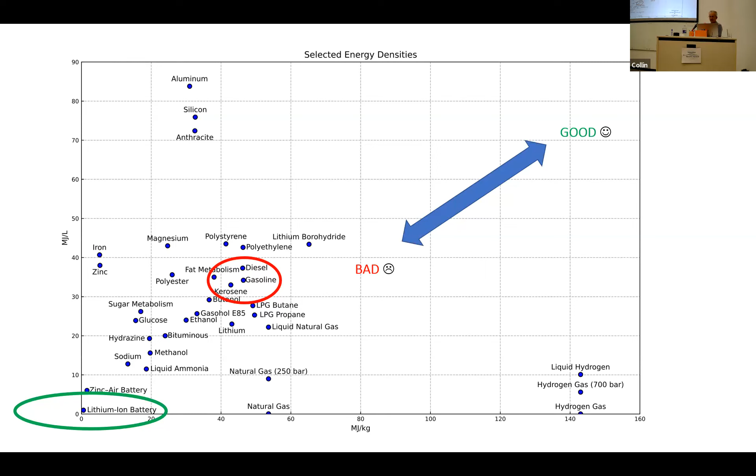Aviation fuel has a usable energy by weight of around 4,000 watt hours per kilogram. It really has about 12,000 watt hours per kilogram, but you can only use about 30% of that energy because the rest you have to dissipate in thermal management—otherwise it's a blowtorch, and a blowtorch burns through steel, any material. Well, maybe not the space shuttle tiles, but you can't make affordable engines out of space shuttle tile materials.

Lithium ion batteries have an energy by weight today of around 250 watt hours per kilogram. Aviation fuel has around 16 times the amount of energy per unit weight that lithium batteries have. I'm going to start off like a Debbie Downer in this presentation, but we're going to get a little better. It is a very large challenge to overcome the amount of energy that's in liquid fuels.

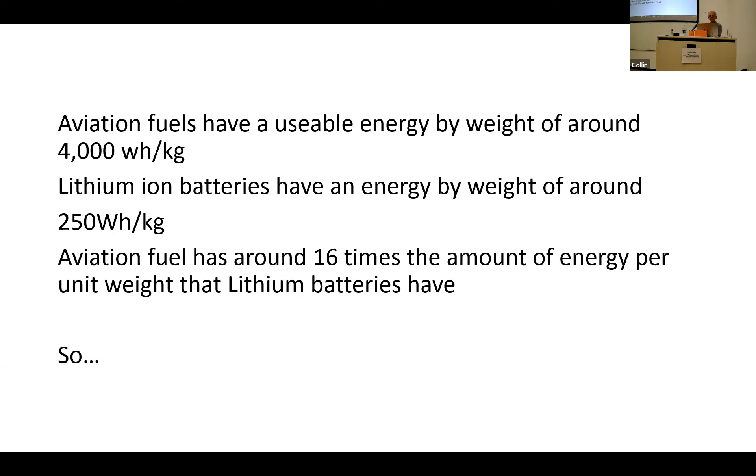The largest airliner, the Airbus A380, can fly 500 people for 16 hours on its fuel load—that's about 8,000 miles. If that aircraft had batteries for fuel based on weight, it would be able to fly... I didn't finish my slide, but divide your miles by 16. So let's see what that comes out to: 8,000 divided by 16 is about 500 miles. So that's not insurmountable. It's not economic, but it's not insurmountable.

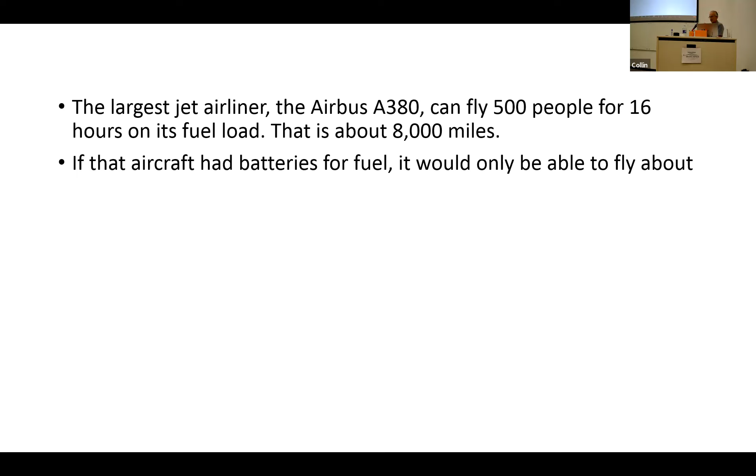So I'm going to talk a little bit about Pipistrel. The reason I'm going to talk about Pipistrel is because, as you'll see, Pipistrel Aircraft, a Slovenian company, is one of the leaders in electric aircraft development and certification. I'll talk a little bit about certification—that's one of the challenges. They started building aircraft in the 80s. They built little hang gliders with a little propeller on the back, called trikes. They started building electric aircraft about 20 years later, in the 2000s.

My Taurus is a 2018. It's a second generation of the Taurus. The Taurus was originally announced in 2011. I think the first ones came out in 2013, and they updated it.

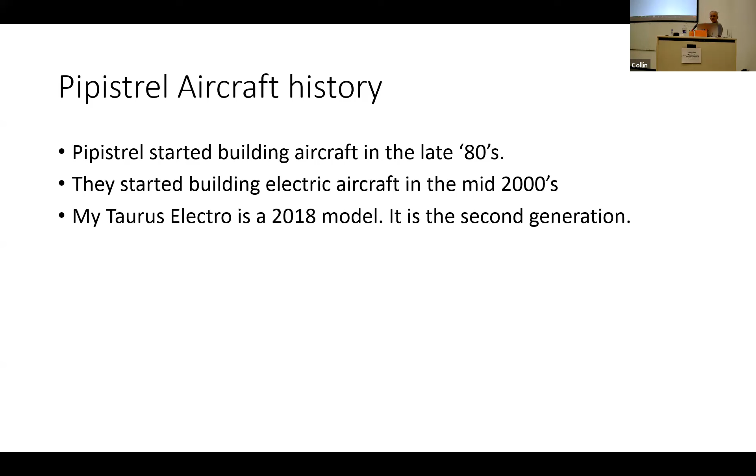Just some numbers. The weight of the battery pack in the Taurus is 130 pounds, and it holds 9.2 kilowatt hours of energy. You don't use all of the energy in a battery pack, you don't do it in your car. I mean, you can, but you run out of juice on an aircraft. You certainly don't want to, because you'd like to have energy when you get to your destination, and your battery also gets stressed, and it shows up in heat.

This Pipistrel has about 7.4 kilowatt hours of usable energy for flight. Not very much. Think about it, most EVs today are anywhere from 65 to 100 kilowatt hours in an electric vehicle. So not very much.

With that energy, though, a very efficient aircraft like the Pipistrel Taurus, which is made out of carbon fiber, is very clean aerodynamically. It's a glider, has very long wings, very high aspect ratio, very low drag. You can take off and fly about 30 minutes.

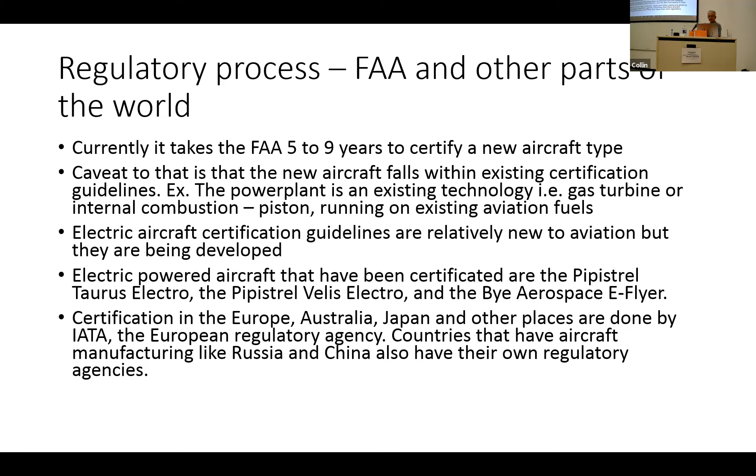So, one of the examples of delay of certification.

In Europe, Pipistrel was able to be the first to get a type certificate in the light sport aircraft category. Light sport is your little Cessna, 2-passenger, weighs about 1,300 pounds, has no more than a 120 horsepower engine. It's just used for training and enjoyment, flight hobby work.

So this airplane, high wing, tricycle gear. I think the horsepower of the engine, the motor, is 70 horsepower, 55 kilowatts of power. It'll fly for about 50 minutes plus what they call reserve. So 50 plus 30, an hour and 20 minutes.

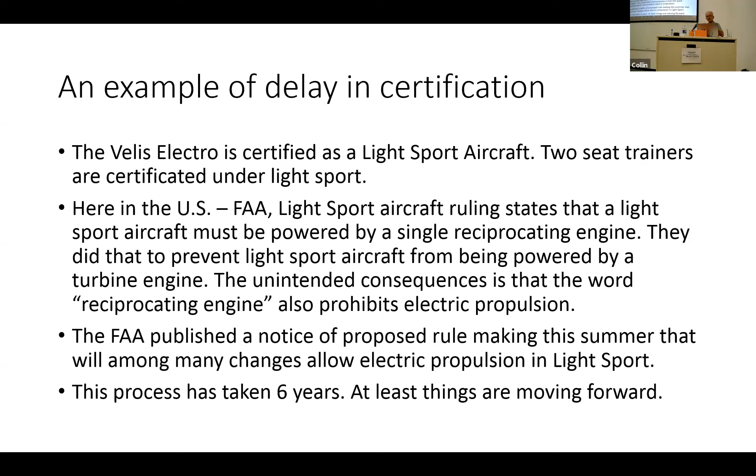I wanted to show you how, from a timeline perspective, we see some wonderful things done in aviation and car racing and other fields, one-offs to break records, but it's another ball game to get that put into production.

I wanted to talk about some impressive experimental work. This aircraft, the Pipistrel Taurus G4, was the first 4-seat electric powered aircraft to carry 4 people 200 miles at 100 miles an hour. It was part of a NASA challenge, and they won the challenge. At the time, it was the most efficient powered aircraft made.

Let's see if I can move. Let me see here. That.

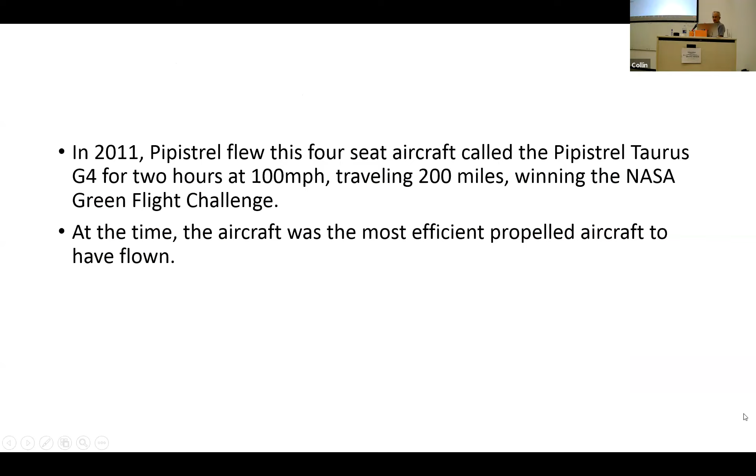Where are we now? 2 seats, flies about 60 knots, cruises at about 60, 70, 75 miles an hour for about 30 minutes. Fold the motor up, take off, fold the motor up. I've done 200-mile flights in that glider, powered by the sun.

Talk about that. So it's a soaring airplane, carries 2 people. Take off, climb to 2,000 feet, get in a thermal, go 200 miles thermaling at 70 miles an hour. So around 35 miles of electric powered range.

So that's an aircraft that in Europe is certificated under microlights, which are less than 1,100 pounds of weight. Some of these hang gliders, powered hang gliders, are microlights. There's a small class of airplanes that are called microlights.

That Pipistrel, you can buy a trailer that has solar panels on it, and it has a battery and an inverter in it, so if you want to go flying someplace where you don't have electricity, you can tow your glider to that site, pull it out of the trailer, unfold it, put the wings on, the tail on, and the battery's charged up.

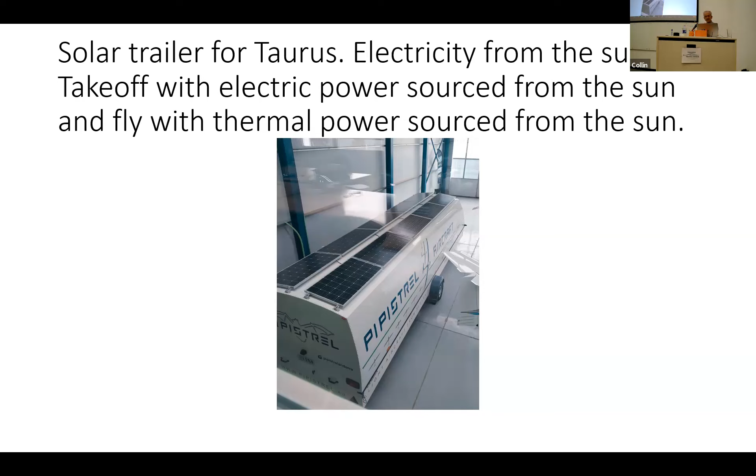The earth has heating and it moves air masses and you get wind, and then instantaneously generated like solar power is solar panels, and we store it in batteries.

So there's the Velis, I talked about that. That plane carries 2 people, 50 minutes with 30 minutes of reserve. It's for flight training and personal flying. You can do 10 or so traffic patterns in it. You can fly out to a practice area, do maneuvers needed for a pilot license. You can fly 100 miles cross country, then charge for 2 hours or so.

That's where that airplane is. They still talk about doing improvements to the thermal management, the cooling of the batteries and so forth to shorten the charging time. The battery size - whereas the Taurus has a 9.2 kilowatt hour battery, this one has a 24.5 kilowatt hour battery, a little more than twice its size. And it's the first aircraft to be certified in the world, I understand that.

One of the reasons they love it for training is because it's so cheap to maintain. Yeah, that's a great point.

I didn't put it in here, but a typical two-seat gas powered airplane is burning somewhere around 5 gallons an hour. Aviation fuel's about $5, so about $25 an hour. But the maintenance on oil changes and everything associated with fuel is quite high, so your actual cost of operating that airplane for fuel and maintenance is more around $50 to $60 an hour.

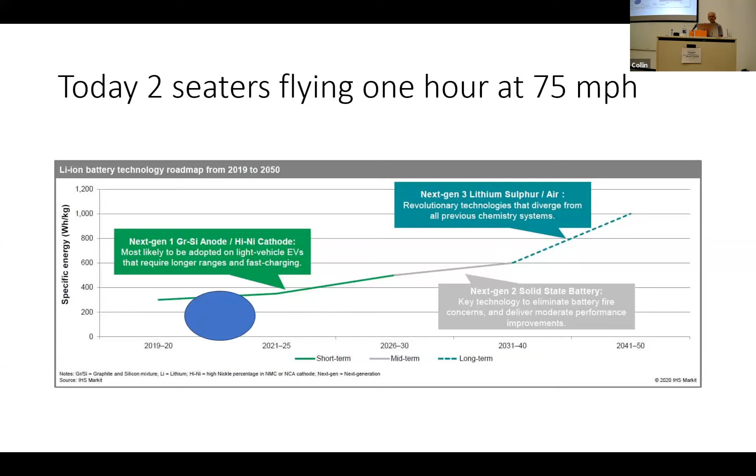So here we are, we're right here in the blue circle. Today, 2-seaters flying 1 hour, 75 miles an hour. And I'm talking about certificated aircraft here, I'm talking about the technology, not one-off experimental technologies. By the way, this is just Kevin's guesses, so it's just something fun to talk about.

End of the decade, 9-seaters flying 1 hour at 150 miles an hour. So commuter, that Harbour Air float plane, maybe something without floats, a caravan carrying people around, going to Vegas, over the Grand Canyon, Hawaii. So tours, that kind of thing, maybe some shuttle services from one side of a big metropolis to another.

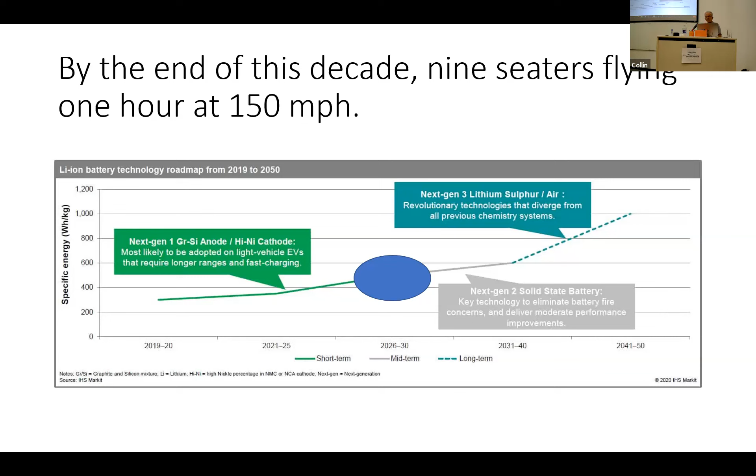Then 2040, 20 passengers flying a couple of hours at 200 miles an hour. We're starting to see that curve going up with lithium sulfur air batteries. Another part of the certification process is not just the electric motor, but the battery systems. The battery systems have to go through proving thermal management, all that, so that they won't have a fire.

I wasn't going to bring it up, but the 787, remember it had fires in lithium batteries. One of the issues was that it had to start the certification process for that lithium battery 11 years before they actually launched the airplane. They actually got locked in to the cells and the battery architecture 11 years before they actually flew the aircraft. Consequently, it had 8 cells, and they only monitored for temperature.

We know that we should monitor voltage, amperage, and temperature in every cell. On that battery pack, they only monitored temperature on the first cell, the last cell, and one of the cells in the middle. They had a technology, I believe it was a manganese cell, and within a couple of years the auto industry got away from it. They picked it in 2011. By 2013, Nissan and everybody else was getting away from that cell because of thermal issues, and Boeing was locked in. So these battery technologies have to be proven.

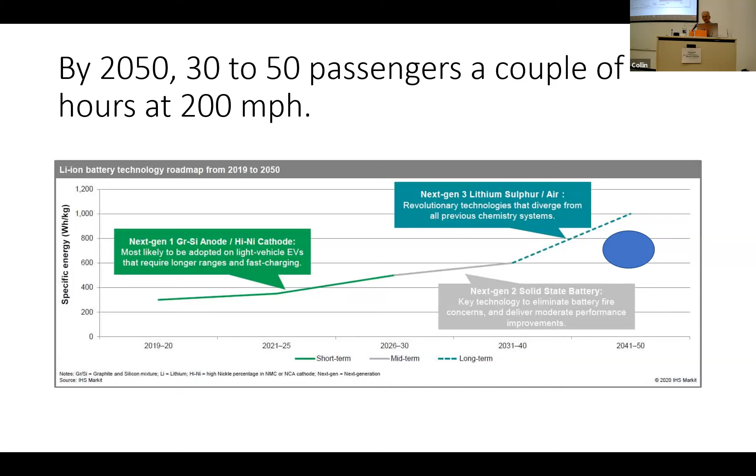So wherever you see a change in the technology, add a decade to be used in aircraft. And then, oh why not, 2050, 20 something years from now, 30 to 50 passengers, a couple hours at 200 miles an hour, maybe a little bit more than that. True commuter services. When I started flying in the airlines, I flew a 30 passenger twin engine turboprop airplane. Actually, when I started, I flew a 14 passenger twin engine Beech, and it would fly 3 hours, carry 14 people, 3 hours plus reserves. So I could see commuter services doing that.

So the above timelines are just my guess, for certificated commercial aircraft. Technology is outpacing the regulatory environment, no doubt about it. And I will tell you that Congress in the United States has already told the regulators, you've got to modernize the process. You've got to bring our understanding of material sciences and engineering modeling that we have available to us, that industries like oil and gas and even aerospace are using.

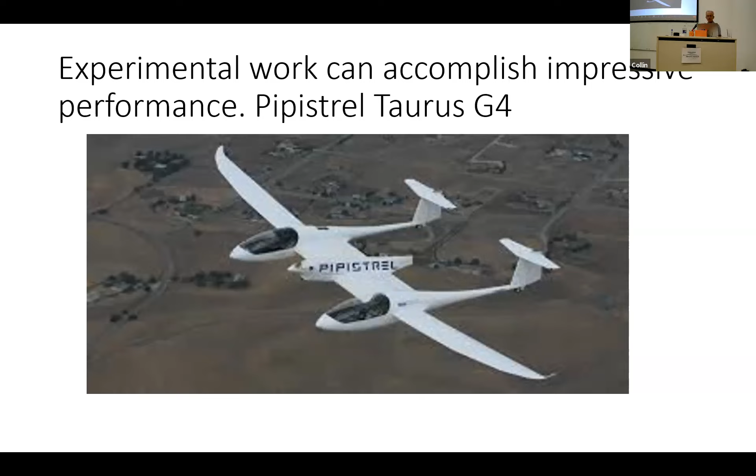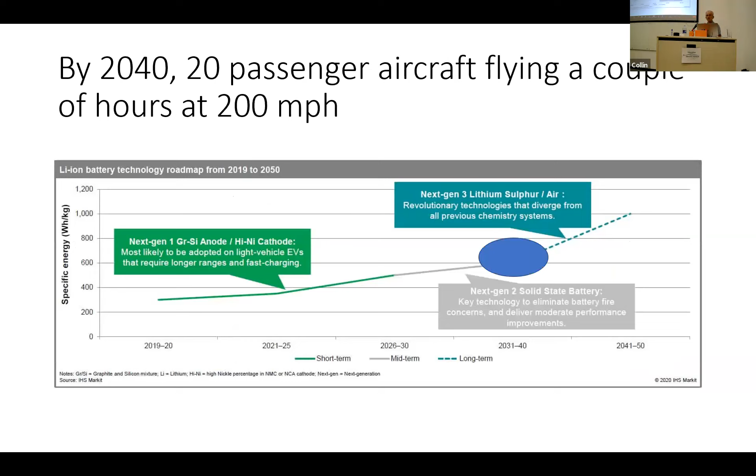Question: is the Lilium commuter aircraft a contender? Who's the commuter, Lilium - you heard of them? So the little ducted jet, they're ducted, is that correct? Who's asking the question? Mark, if you're talking about Lilium - can you unmute for a second and say yes? Yeah, I'm online. Is it Lilium?

Yeah, Lilium has been working on commuter aircraft, actually setting up flights in Florida. But like most new entrants out there, they keep getting delayed further and further. But they do seem to have a lot of good ideas, and it does seem like they're quite far along in actual flights. Anyway, it's kind of a unique design, but they're just another one of the manufacturers of commuter aircraft.

Totally electric. Yeah, I'll show you guys a picture of Lilium here when we go to questions. So I had been following Lilium - they had quite a bit of capital behind them, and they were doing some stuff. Things have kind of slowed down. I have not heard many updates on them.

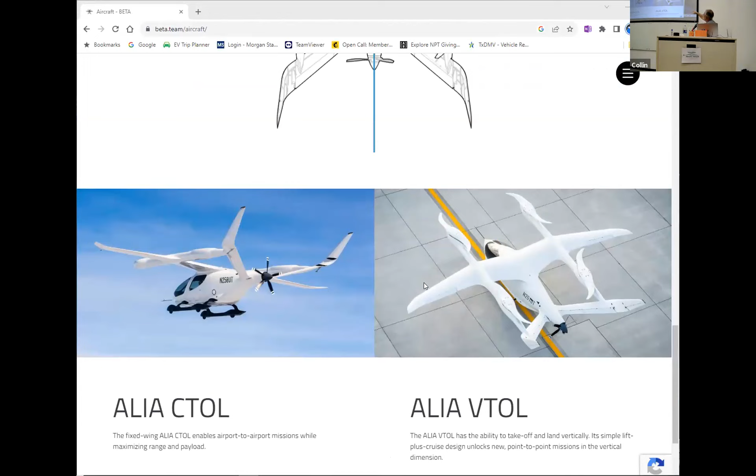So what this aircraft would do is it would take off vertically by swinging those 4 propellers that are above the wing. And then they would start adding power from the back propeller, start propelling the aircraft through the air, generating lift with the wing. And as the wing generated more and more lift, they slow down the propellers above the wing to where they eventually just line them up with those booms to minimize drag.

This idea of having propellers that - either you use one set of propellers for vertical flight up and down, and then you have a pusher, or you use propellers that are on some kind of gimbaled structure where the propeller can start off horizontal to the earth, so the air vehicle can take off vertically, and then it can transition forward so that it can do forward flight.

But having a drone and maybe - let's see, can folks see me? Let me see here. Not sure what screen I'm sharing. Here I am, I don't know if you can see me. Do I need to share? No, you're doing it. You are sharing screen, am I? I can't tell. No, mine says you're sharing the screen. So see what the chat says. Okay. See, there, yeah, can you see me? You're up there, and all right.

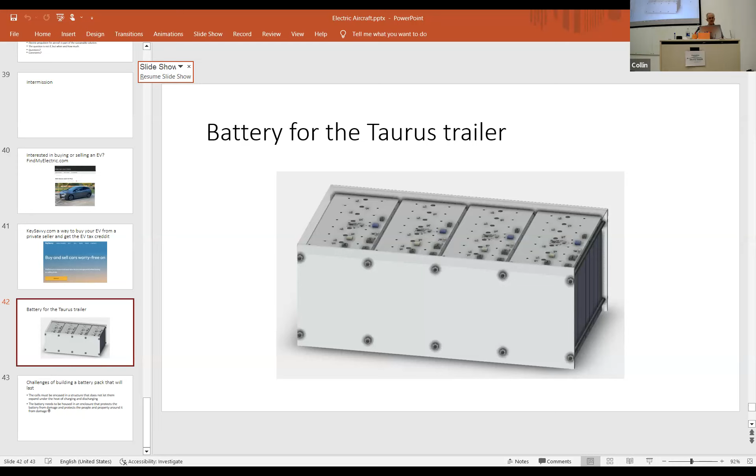As many of you know, the challenge in putting together a battery is that the cells have to be in a structure that does not let them expand under the heat of charging or discharging. If you don't put these prismatic cells in some kind of constraint, they will expand and get damaged. And then of course you need some kind of housing to protect the battery, the BMS boards, and also the people around the battery.

The work I'm doing, Kevin's doing, is just to add plates and tie rods that compress the cells, as Kevin indicated, and prevent them from growing. I have some lithium cells in my container outside, and this is about two-thirds the cost of what I paid for those. I think it's fairly unique in that the BMS lives on that circuit board connecting all the cells together, and this may be a trend in the industry.

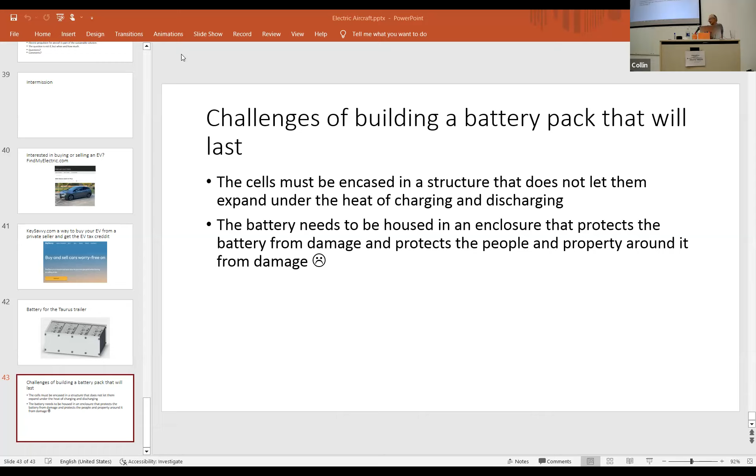I hope that you guys learned a little bit about electric aircraft. It'll be fun to watch and participate in. Thank you, Kevin—that's all I have.

Appreciate it, Kevin. Good presentation.